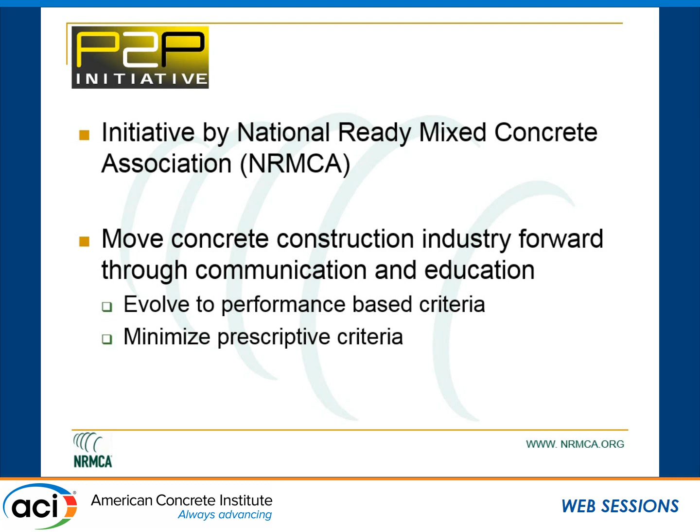But we feel that when there is a prescriptive specification, the responsibility chain is not very clear. In fact, the courts will say if someone told you the prescriptive requirements, the person who prescribed it is responsible for whatever happens on that project. And we heard a couple of presentations yesterday from Europe, and they're pretty clear on that. In Canada, they're also very clear on that. What is prescriptive concrete? The responsibility changes to the person who actually specifies that requirement in terms of the achieved performance. And so what the industry feels is that even though they're prescribed, they are still held to blame if the concrete doesn't perform as intended, so might as well evolve to performance-based specifications.

This is an ASCE document, American Society of Civil Engineers, and they have a definition of a prescriptive specification. This is a broader look at it. Basically the means and methods are dictated in the contract documents. You're telling the contractor exactly how he needs to achieve something. It's a recipe for completing the project. Sometimes the end result is intended, but it may not be precisely defined. And remember, when you write a specification, you have to have something that is clear and enforceable in that outcome. Contractors, therefore, and this is the big issue here, cannot be faulted if the result is not achieved. That's nice in theory, but that really doesn't happen in reality.

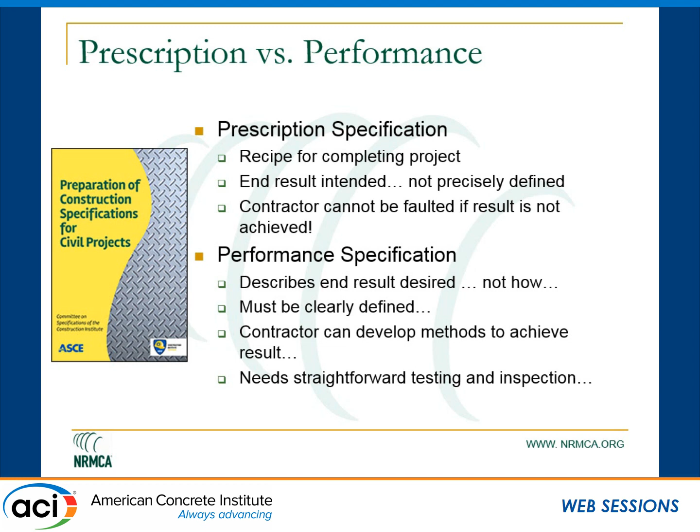Performance specification, on the other side, is a better description of the end result that is needed and not how you get there. Okay, so that's the important part. But then it gets to be challenging to clearly define what exactly you want in that performance attribute. We have a wide range of concrete members and exposures, and concrete is a beautiful material in that it can be customized for the various properties and exposures that we anticipate. So we can change the requirements as we need to. The contractor then can develop the means and methods to achieve the end result, but on the other side, there needs to be some straightforward inspection to make sure that what was specified was actually achieved, and that can also be challenging.

So when we get back down to the concrete mixture, this is what National Ready Mix really cares about: what do we mean by performance? What we mean by performance is that you can't come to the concrete producer and say, give me a mix that'll last 100 years. The concrete producer has no knowledge about where this concrete is going. He has no knowledge about the design of the structure and the type of exposure this concrete is going to be in. So it is a collaborative process that includes the design, the construction, and the materials used, and so it's a joint responsibility of all the stakeholders.

But when we talk about performance, we're saying, is there a standard test method that can measure a defined property with defined acceptance criteria in the project specification? And then you don't have many restrictions within that specification that restrict you to put that mix together to meet that performance. So there are no requirements on the composition of the mix. Okay, so that's essentially how we're trying to define performance.

Now there are some variations in there when we don't have a reliable or achievable test method to measure a certain property, but we know that there is a historical intent, let's say, that this particular prescriptive requirement meets the intent or is deemed to satisfy, then we can consider that as a defined performance because of that.

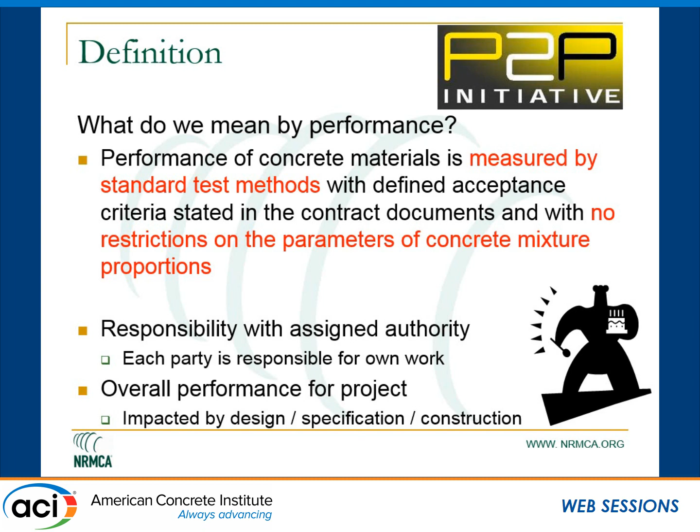ACI also has this other committee, ACI 132, which is a responsibilities committee. This is an interesting document. It's almost bordering on lawyer speak, because it's trying to define the responsibilities of the various stakeholders. And some parts of this document speak to the responsibility as it associates with performance and prescriptive specifications. So if you're interested, take a look at this document and see how that fits into the overall scheme of things.

We have developed several resources as we've been through this journey in developing the P2P initiative. You can go to our website, nrmca.org/P2P. There are guide specifications written in the master spec format. There are guide performance specifications. There are research reports. And then on the right side, this is essentially the specification and practice sheet that I'm going to speak to a little bit.

These are primarily 5 prescriptive items that we see very prevalent in specifications in the U.S. that we're trying to say, okay, let's try to evaluate why we have them and maybe remove them from our current specifications. And so I'll go through some of this in this presentation.

Now, we in ACI published the ACI 318 building code. We also published the ACI 301 specifications, and primarily the specifications support the code. But most private design firms essentially get licensed copies of either AIA's master spec or spec link or whatever, and then modify that to their own office design masters.

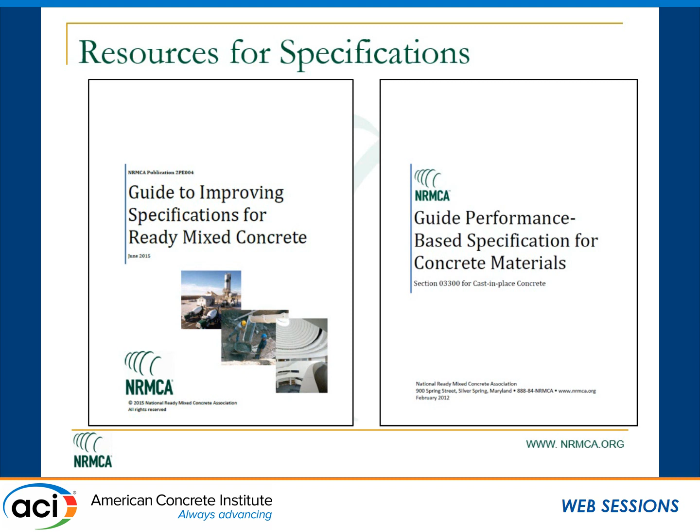The guide performance spec is sort of a wishful thinking type document that looks forward, and we will be trying to use both these types of provisions in ACI Committee 329, where we're developing some stuff. ACI Committee 329 was formed as an important committee to challenge and move to innovation in the concrete industry. It formed about 5-6 years ago.

There was an innovation task group that was formed through the Strategic Development Council. They developed an ITG-8 report within 2 years. It is a pretty comprehensive report with a global look on performance specifications, as well as how we might evolve within the industry standards in the U.S. towards more performance-based requirements. So this report is published.

That ITG-8 report was taken by Committee 329 and then made a committee document. So it's a guide to evolving to performance-based requirements. The committee is now working on a guide to writing a performance specification for concrete materials. Okay, it will be a guide to writing one.

It's not going to be a reference specification like ACI 301 or ACI 306.1 or something like that, but it will give you advisory information and it will give you typical clauses, and we've chosen to use the 3300 format or the master spec format as we develop that document, so that hopefully engineers can copy, cut and paste and incorporate these types of provisions in their own office master documents.

One of the biggest challenges in moving towards performance is credibility. If you speak to many engineers, they say, we got burnt before, we don't think the industry can deliver. And I think the problem is chicken and egg. If you continue to do business the way it is, then you continue to get what you've always done. And if you don't challenge the industry to move towards a different mode of how we do business, you will continue to do that.

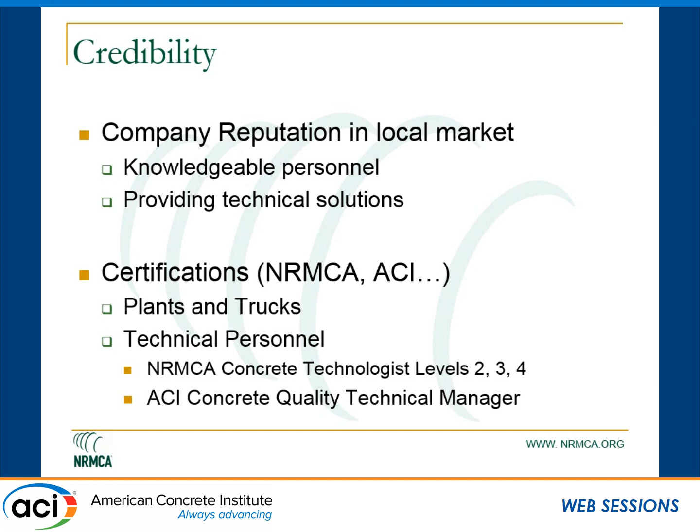NRMCA has a concrete technologist certification program going from level 2, level 3, level 4, talking about durability requirements in the building code. In many cases, some of these guys know much more than some of the design engineers writing specifications related to concrete materials. ACI has recently developed a concrete quality technical manager, a very comprehensive certification program that takes, I think, basically the manual of concrete practice as it's relevant to concrete mixtures and tests people on that. So take a look at that. That's just getting off the ground within ACI.

And one of the things that NRMCA did when we started this initiative is we got a few design professionals together and said, how do we address this credibility issue? And they said, well, you build it, we will come. So we developed what's called a minimum standard quality certification for the industry. This is basically making sure that they have at least a minimum standard for a quality management system, and they actually conform and follow that quality management system that they have defined for themselves with minimum criteria addressed in this certification program. We have built it, they have not come. We're looking for people to either specify it or to start using it.

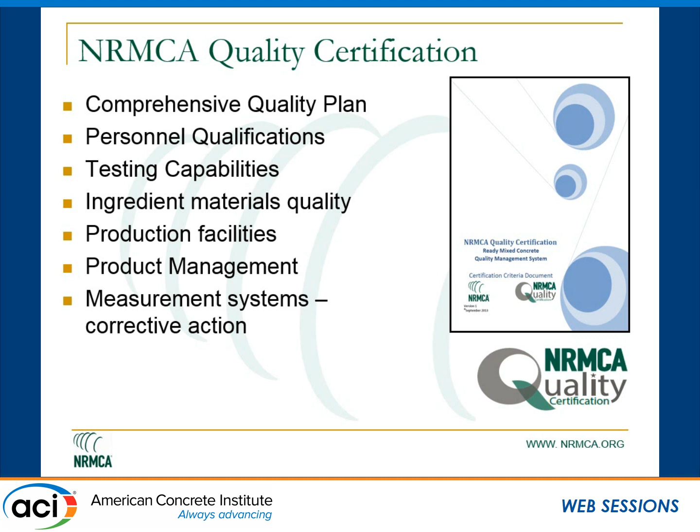But it's pretty comprehensive: we look at the quality plan, the personnel qualifications, their ability to test the concrete and ingredient materials, how they manage the materials that they get into their plants, that their production facilities meet minimum standards, et cetera. So this process in a quality management system is hopefully a process of continuous improvement.

So what are the benefits of performance? You have to have the right message, and the message will differ depending on who you're talking to. For the producer, it might be, I can save on some material costs and therefore increase my profitability. For the contractor, I will get the mix that I can work with easier. For the designer, I have a quality team that's working for me, and therefore I'll be on time, on schedule, within budget. So it depends on who you're talking to. For the various stakeholders, the message might be different.

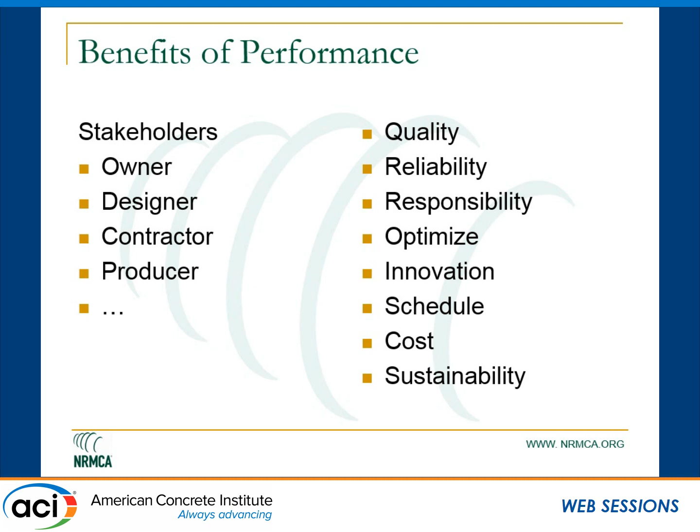And you have to find out what interests that particular stakeholder, whether it's quality, reliability in the construction process, the change of responsibility. Many engineers don't want to get involved with concrete mixtures. They want to delegate that responsibility. We want to optimize. We want to be sustainable. We want to reduce cost. All those things, we can develop these messages when we talk to the different stakeholders involved in that process.

So how do we start? We don't have to make it complicated. That's the important thing. Can't make a drastic change so that people say, what are you talking about, and don't want to go there. So the first step, basically, how are specifications developed? Well, for the most part in private design firms, they get AIA MasterSpec, or CSI SpecLink, and start modifying that to their general provisions. There is also general reference to ACI 301 as a cover-all. Then you add on specific provisions as pertinent to your project.

The problem has been that AIA MasterSpec is so dated, and we have developed comprehensive comments and submitted them to AIA to say, at least change your specification. We've given them specific language changes and rationale for them to change it. And so they're trying to work through that process. Hopefully we will get them. And I think that dialogue between ACI or our industry and AIA doesn't exist to the degree that it should. So our first step, let's look at our specifications, see where we do have prescriptive requirements. This is just a listing of some of the prescriptive requirements that we see in most specifications, and I'm not going to go through this in any detail.

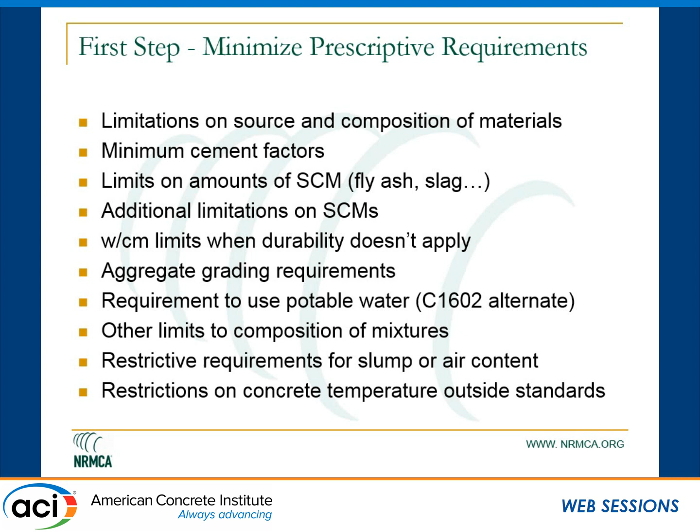When we took this list and sent it to the ready-mix concrete industry, we said, okay, what are these prescriptive requirements that cause you most heartburn, if you will? The first step is look at and minimize prescriptive requirements, figure out why it's there in the first place, and maybe remove it. The next step is then develop the properties you require by application, both for fresh concrete. That would be a communication between the contractor and the producer, and most engineers probably don't need to tell the contractor what slump he needs to use. Let the contractor choose a slump depending on his placement methods. You need to be informed about what that choice is, but you should leave that between the contractor and the producer.

Hardened concrete, naturally, the designer wants to know about and whether you can achieve that. And the hardened concrete will depend on the type of member you're constructing and the exposure that member is going to see in service. So foundations will have different concrete, slabs, beams, interior, exterior. You can then establish requirements by member type. When you get to transportation, you have bridge decks that may need something, substructure needs something else, pavements that need a totally different concrete mixture. So by application, develop the necessary properties.

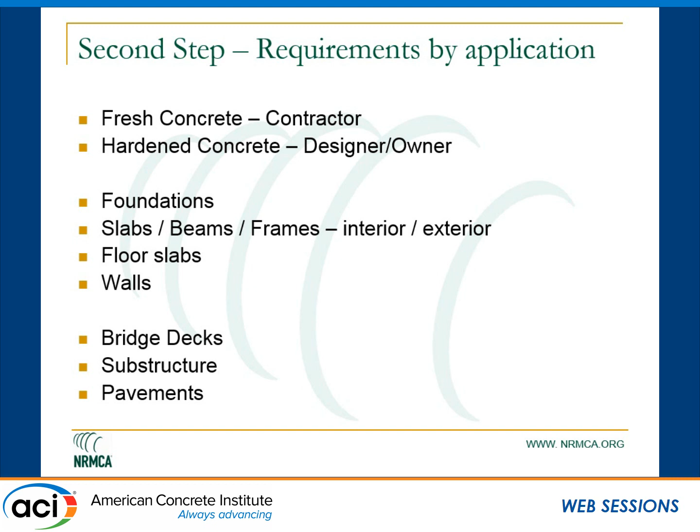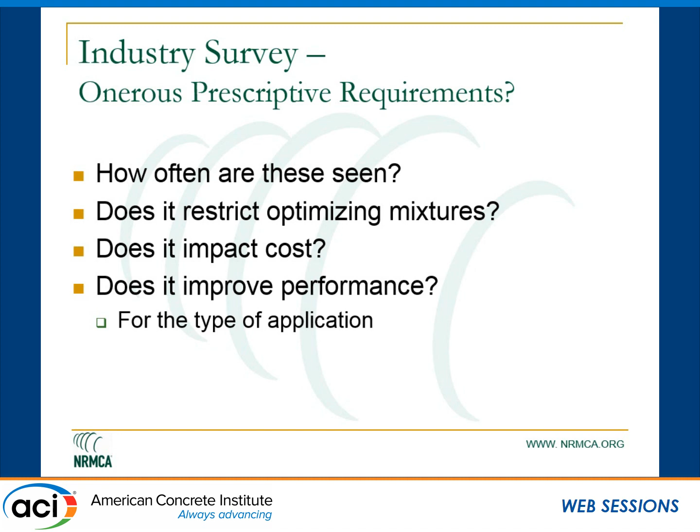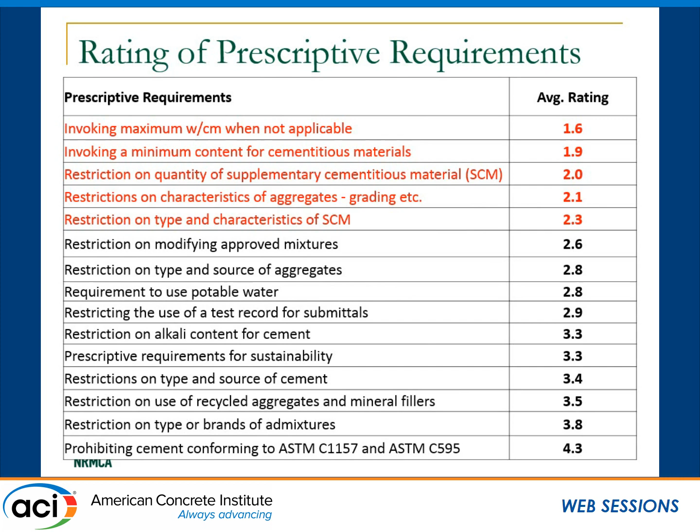So in our industry survey, we sent the list of the prescriptive requirements, and we asked them, which of these cause you most heartburn? How often do you see them? Does this restrict you from optimizing the mix? Does it affect your ability to impact the cost of your concrete mixtures? Do you think it really improves the performance? So we ranked these, and the top 5 would be these types of things: invoking a maximum water-cement ratio when it's not required. You'll see a typical clause saying all the concrete on this project shall have a maximum water-cement ratio of 0.4. Why? We don't know. It's there. It's better to have low water-cement ratio than not. I'm going to go through some of that in this presentation.

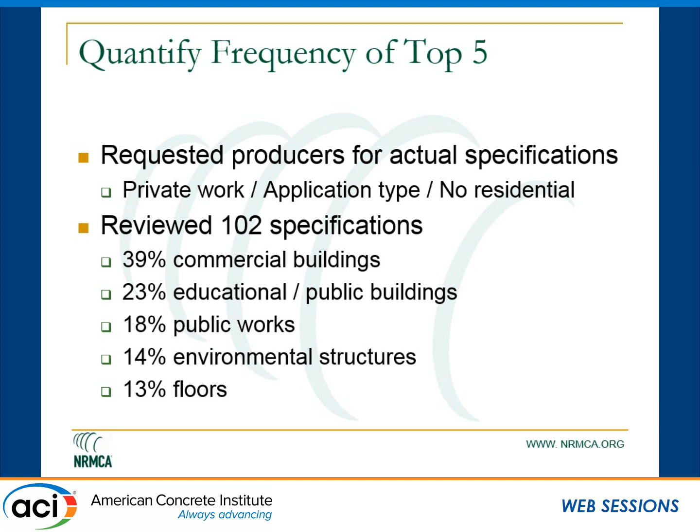Then we actually asked the producers to send us the specifications they are working on in projects, and between Karthik and myself, we reviewed about 102 specifications to identify whether these clauses existed. We did not get public agency specifications. It's all private work, and these were the types of projects that these specifications represented. So this was the state of prescription, if you will, in our analysis of the current specifications. A restriction on the quantity of SCM as a general requirement.

That means you cannot use more than so much fly ash or slag in your concrete mixtures, was there in 85% of the specifications that we reviewed. Where do we have this in industry standards? In ACI, the only restriction that we have this in is when a member is designated or assigned to an exposure class F3, where it's going to be exposed to freezing and thawing exposure and the application of de-icing salts.

Okay? Maximum water cement ratio when not applicable. This tends to be a two-pronged problem. One is that it's an interior member, you don't really have any exposure condition, but there's a water cement ratio limit on that. Okay, so that's one of the things.

The second type of problem is where you have a water cement ratio and the strength that is specified is totally not in sync with the water cement ratio. And so that's another problem where you have, let's say, a 0.4 water cement ratio and a 3,000 psi concrete mixture requirement. And that's sort of a disconnect that causes a little bit of issues because they're two different mixes. Okay, a 0.4 water cement ratio mix is totally different from a 3,000 psi mix.

Minimum cement content. We see this in 46% of the standards. In our industry standards, we have a minimum cement content in the ACI 350 code that was recently instituted. Not sure why. ACI 301 has minimum cement contents for finishability of floors, and the values of the cement contents are relatively low. Restriction on the type of SCMs, and then restriction on aggregate grading. So we see that these types of clauses are there in the spec, that percentage of the time.

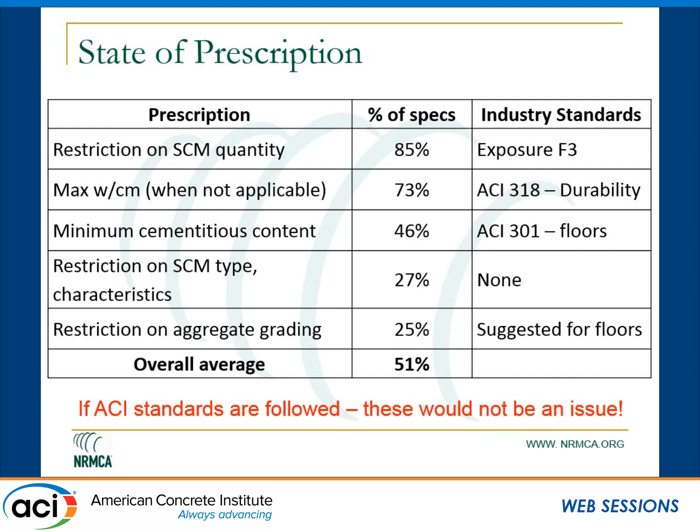So the overall average is sort of a ballpark, that we are 51% prescriptive. Okay, so that's just a general theme of that. So if we can start eliminating each one of these, we can get towards, let's say, less prescriptive, hopefully more performance-oriented. If ACI standards were really followed, none of these would be an issue because you have a specific reason that these requirements are instituted in industry standards.

Okay, we wrote an article. You can read this article if you're interested in more detail in August 2015, Concrete International, and then we developed what we call the Specification in Practice sheets. These were also included in that particular issue of Concrete International, and if you're interested, you can go to our website. And these are 2-pagers, front and back, and basically we go through the process.

What is the requirement that we see? Is this requirement in the industry standard? What do we think is the basis for this requirement? What are the implications? What are the problems caused by this requirement? And we suggest some alternatives and a benefit for that alternative. So you can look at that and see if this helps, or you can distribute it to engineers if you feel that this is something that can help you change a specification you deal with.

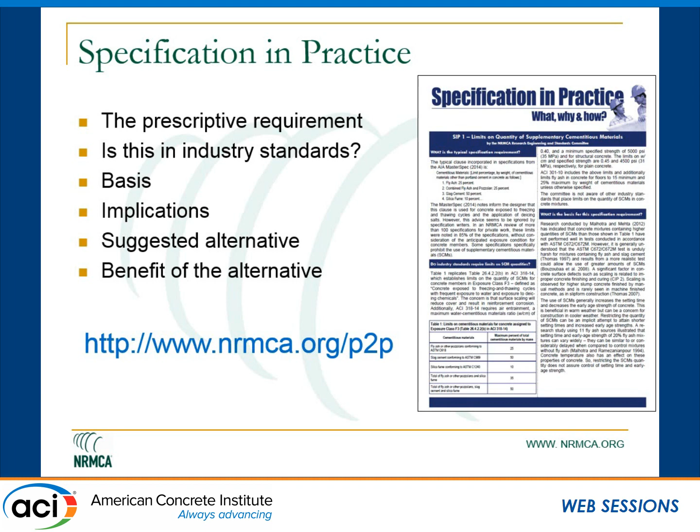So the Specification in Practice sheets are: one is limits on quantities of SCMs, limits on water cement ratio. The third one is on minimum cement content in specifications, restriction on the type and characteristics of fly ash, and restriction on grading. So those are the 5 topics that we chose to do because these were the highest rated or the ones that caused most problems.

Now, we have brought some of these documents into ACI committees. Number 3, minimum cementitious material content, has been taken up by ACI 329, and it's actually been approved and will be on the street pretty soon. Okay, we are a performance-oriented committee, so we actually balloted this document and approved it before we even got permission from TAC to develop it.

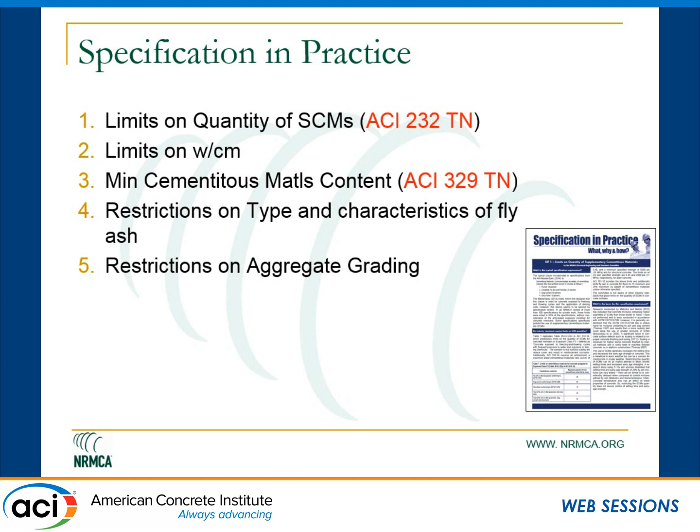ACI Committee 232 is a slower reacting committee. They are actually still discussing whether they want to do this technical note. This is called a technical note in ACI. So it's an easier and briefer type topic that will address one specific issue, and many committees are using technical notes to disseminate information in a faster time frame. So we chose to do this. So you'll see the technical note from 329 come out pretty soon, and then I think committee 232 on fly ash is balloting the other one pretty soon also.

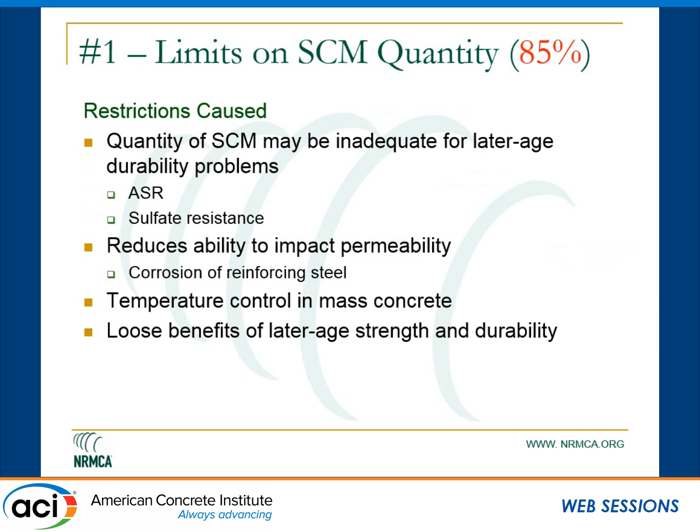So let's go through this a little bit real briefly. Restrictions caused by SCMs. You know, the SCM quantity, you see that you have various issues where the quantity of SCM may not be adequate for durability and stuff like that. So you do have various things like that listed. Maximum water cement ratio. Why do we need it?

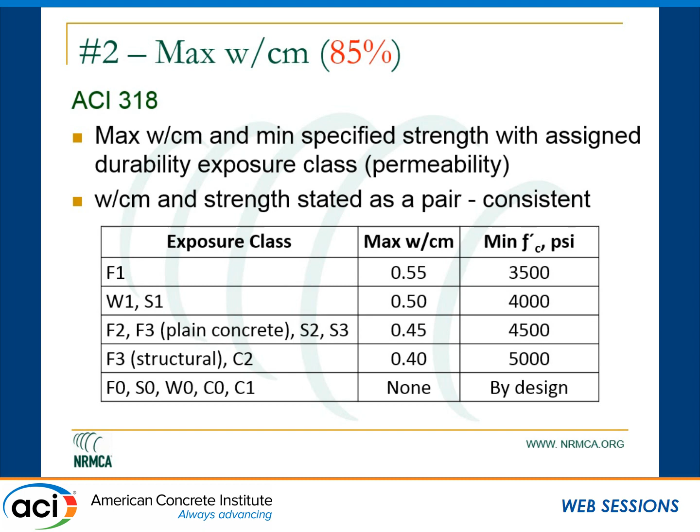When we have a specific exposure class in concrete, then as defined by the exposure class definitions in ACI 318 and 301, there are specific reasons when you would use the water cement ratio. So try to stick to the exposure class requirements for water cement ratio definitions.

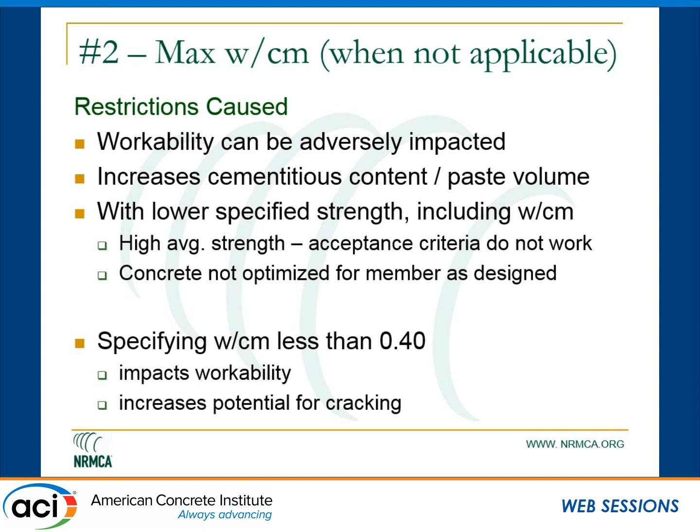When we have a low water cement ratio, we really have a problem sometimes with workability when it gets too low, when it's unnecessary for certain applications. You also tend to increase the paste volume of the mix, which causes other problems with the concrete mixtures and stuff like that. And it's really not necessary for most of our applications to specify a water cement ratio less than 0.4, unless you're getting into very severe type exposures.

Minimum cement content. We really don't have any restrictions for minimum cement content in our standards. There's nothing in ACI 318. There are some cases in ACI 350 for environmental structures. And for floors, you can see that the minimum cement content for floors to get enough paste is relatively high, but there's an out to that. If you can do a mock-up and actually evaluate a test slab, you can use less than the minimum cement content.

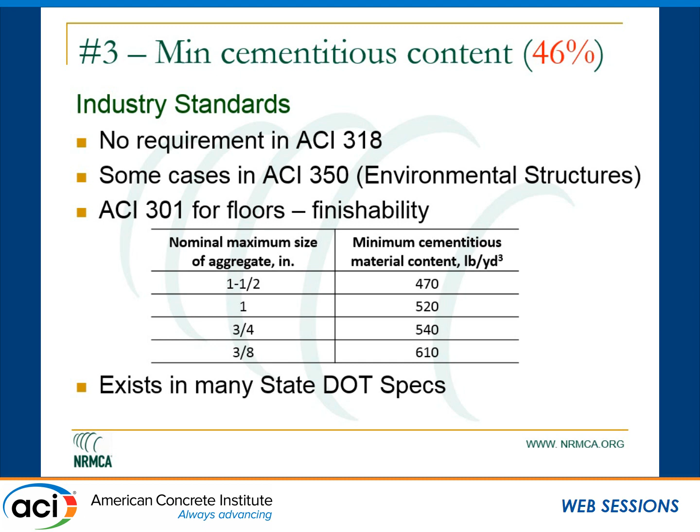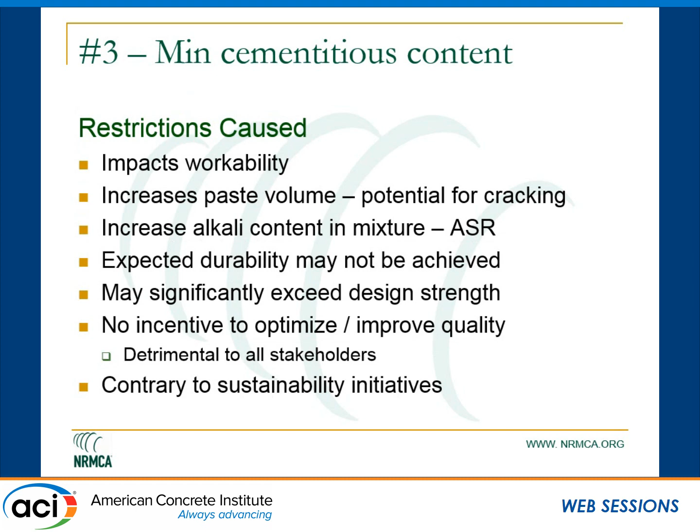Most state highway agency specs have their classes of concrete defined by cement content, and you'll see that in European standards as well. So we see that when you have a minimum cement content, sometimes these numbers are very high. It does impact the workability. You do increase the paste volume of the mix that has increased potential for cracking. You have other problems, and all these restrictions are discussed in our SIPs.

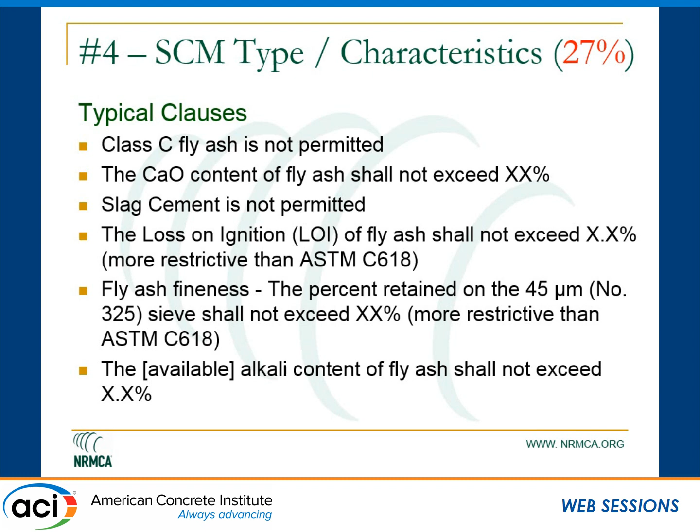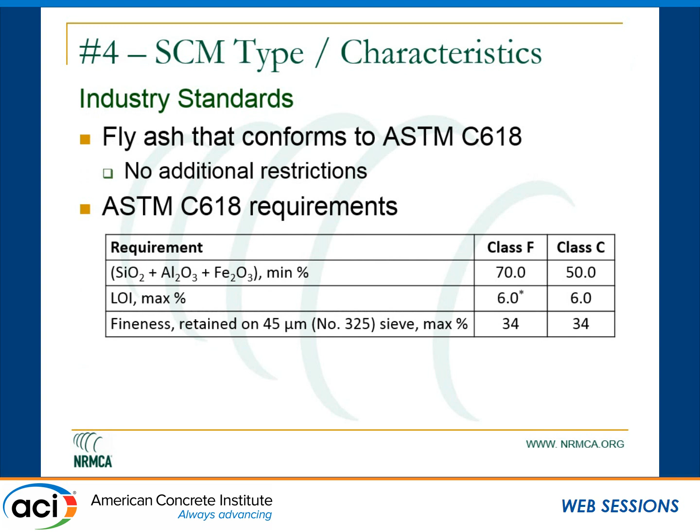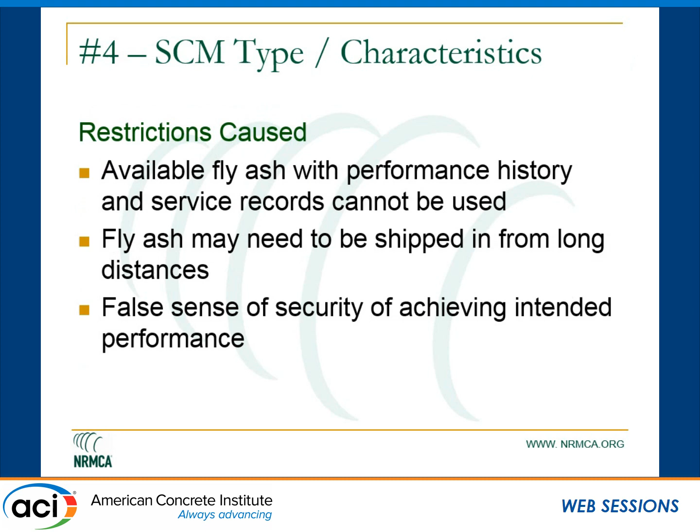The other one that we see is that available source of fly ash, which is now getting to be a problem, is restricted from use because of additional restrictions within a specification, such as not permitting the use of Class C ash or changing the loss on ignition requirements and stuff like that, that basically say that available supply cannot be used. And that's one of the problems. There are no specific restrictions within our industry standards on the specific fly ash other than it meets ASTM C618. The thing is that producers develop a history and comfort with the particular materials that they use, and if they're forced to use something else, they don't have that history.

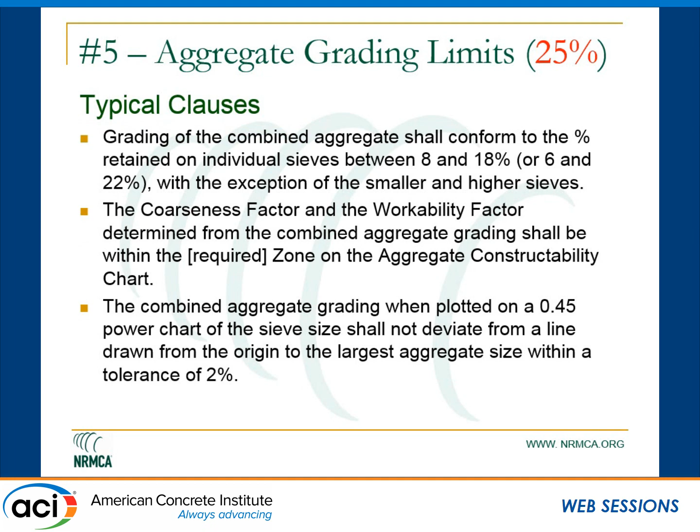Aggregate grading limits. Again, this you'll see mainly on floor type concrete. The primary goal is to change workability, probably to change the curling or shrinkage characteristics of the mix, and those sorts of cause other problems. Generally, in many markets, we cannot meet the grading requirements that are specified. It may need a lot more storage.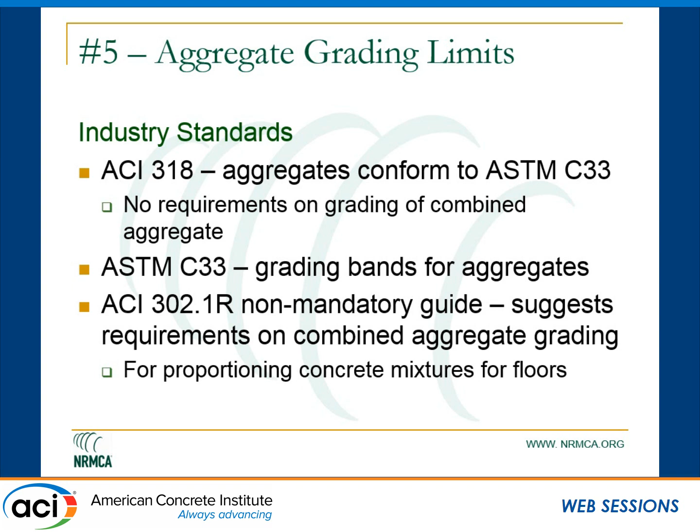We understand the general technical intent, but if there is a performance measure such as shrinkage that can be specified as an alternate, recommend that you do that. So the intended performance may not be achieved. The requirement generally cannot be verified during a project on the grading limits other than looking at a spreadsheet and those sorts of things. And the basic message here is that optimizing the grading of the concrete is a step in the proportioning of the mixture, and it's really not a specification requirement.

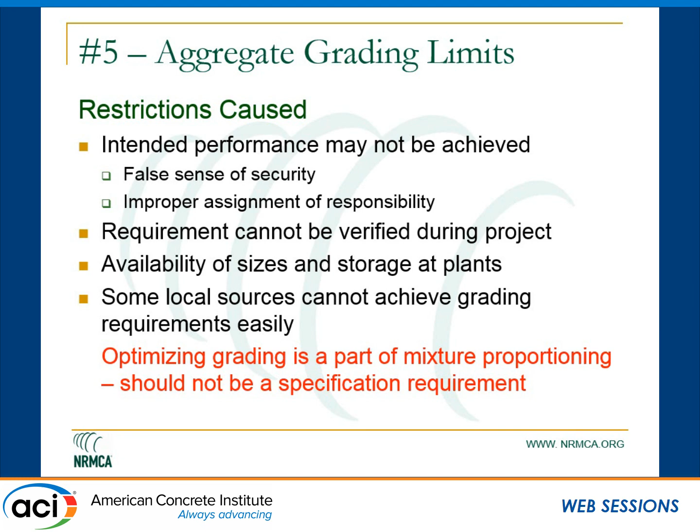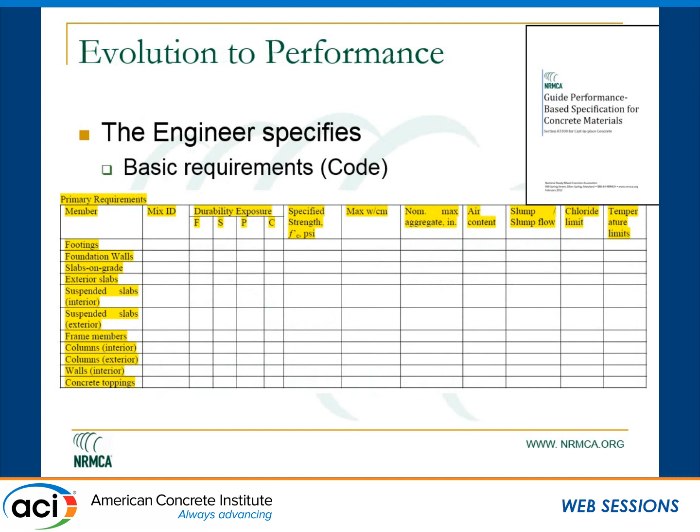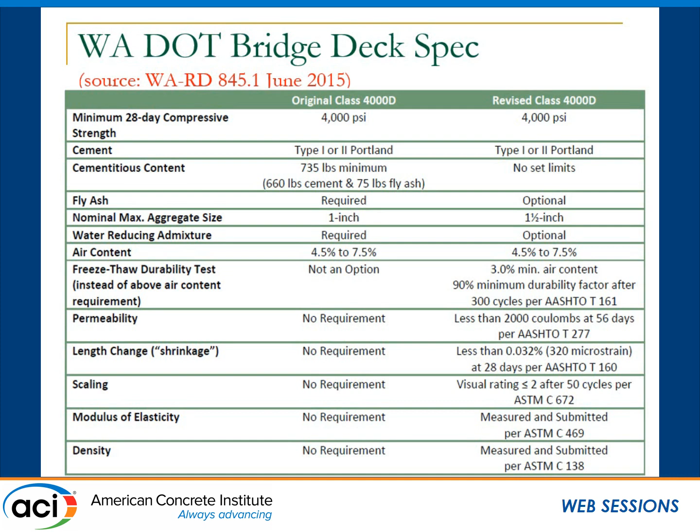So changing specifications, there are various documents you can look at. You can probably define the requirements for basic code requirements by member type and add on specific performance requirements as needed. This is an example of the Washington DOT's change from a totally prescriptive type concrete to now a more performance type mix. This speaker was supposed to attend, but it's an example of some state highway agencies that are getting more progressive in evolving to performance-based specification.

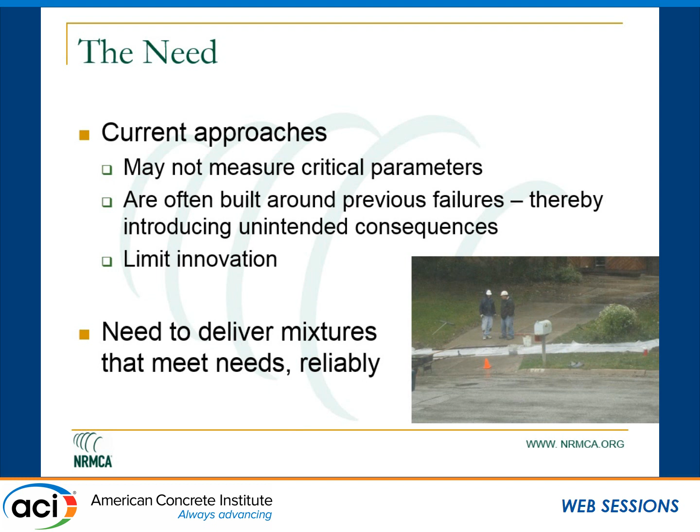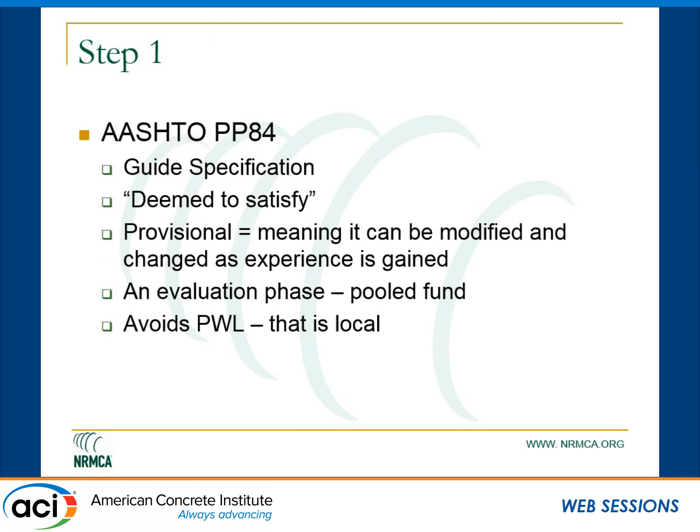Just a mention of the Federal Highways program towards performance engineered mixtures for concrete pavements. This is now developed as a provisional standard in AASHTO. The primary goal is to improve the durability and service life of concrete pavements. The standard is AASHTO PP84. It's a guide specification that states can adopt, and that will be available next month from AASHTO as a provisional standard. And it is called Developing Performance Engineered Mix for Concrete Pavements.

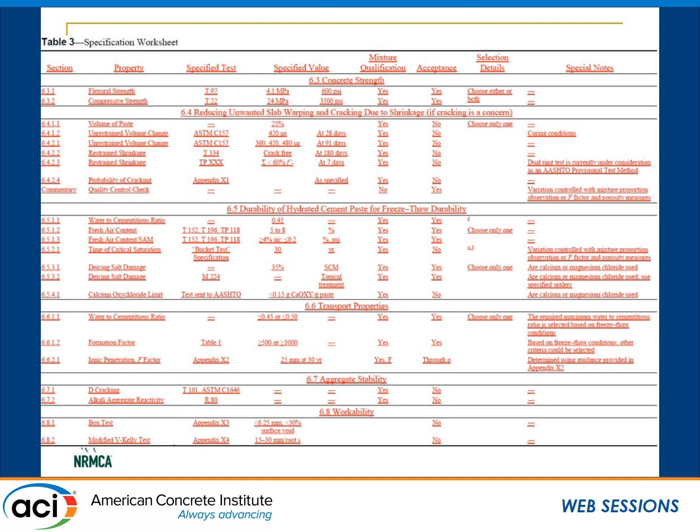And you can't read this, but it has various properties. It has various options for those properties, and it's pick one. Don't pick more than one for each of these. So you pick one that you can feel comfortable with. It could be prescriptive, it could be performance, it could be model-based. So they are evolving towards that, and in a 5-year pooled fund study, they will be actually evaluating all these types of properties in paving mixes on actual paving projects. If you want more information on that, Peter Taylor with the Iowa State Concrete Pavement Technology Center would be the primary contact on that.

So I will end on performance-based specifications. It's where the future is, or I think it should be.